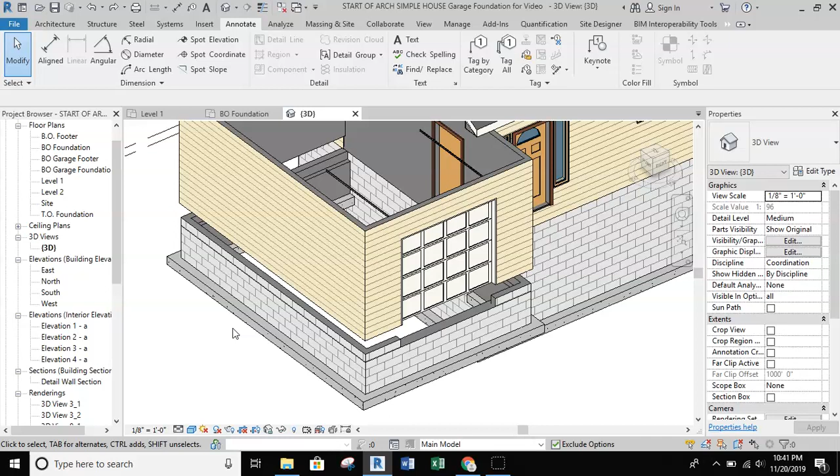Okay, in this video we're going to continue with creating a garage foundation system and installing an insulated concrete slab. So I'm going to just hide these walls quickly so we can take a look around our garage so far.

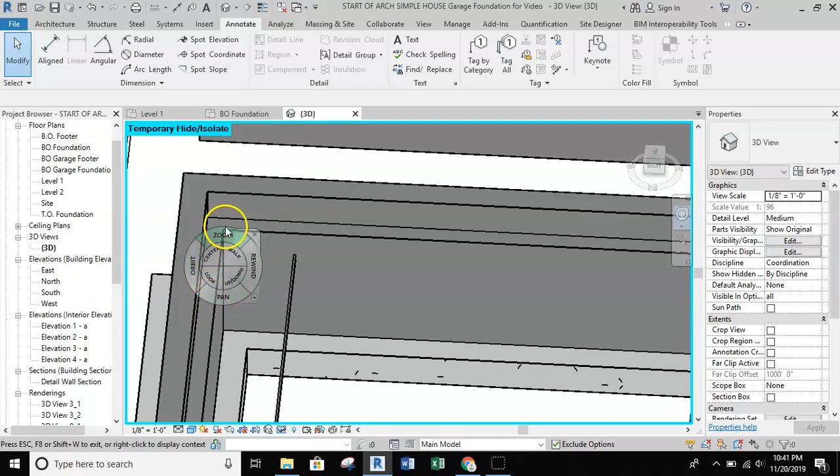If I turn this around, you can see down inside of the garage, and you can see this lip right here, where my cursor is running back and forth over. That is going to be the concrete ledge that has been created by the foundation wall, and that's going to be the ledge that holds the concrete slab. So what we can do now is continue to work on putting that slab in.

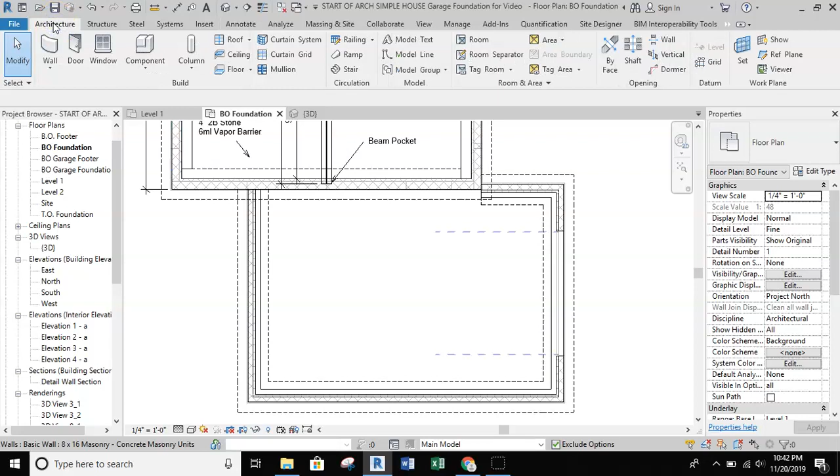What I'll do is go back to this foundation drawing and start setting up that floor system. So I'll grab my architecture tab, slide over to the floor systems, and find a floor that I can work with. So here's a 4-inch concrete floor with 4 inches of stone. I just want to edit that type.

I'm going to duplicate the floor and keep the 4 inches of concrete. Instead of having the 4 inches of stone, the stone's actually going to become a separate floor system in and of itself. So I'm going to keep the 4 inches of concrete and then have 2 inches of rigid insulation underneath of it. So we'll continue to set this up.

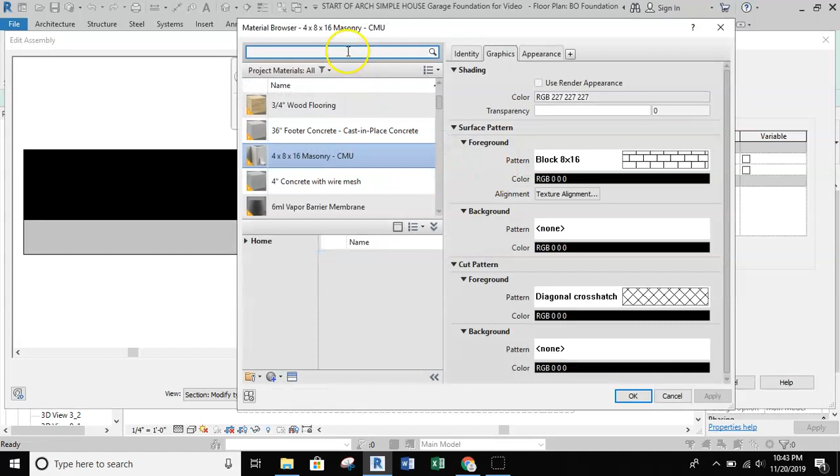We're going to delete the gravel. The 6ml vapor barrier will end up with the stone, so we'll get rid of that as well. And I'm going to insert the category of insulation. So we'll go find that insulation. There's my 2-inch rigid insulation. Keep that information there, all fine and good. 2 inches of insulation, all set, and we'll hit OK.

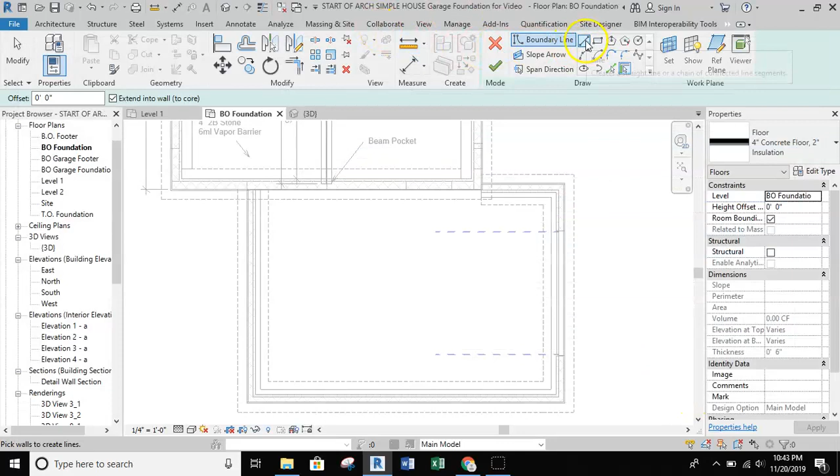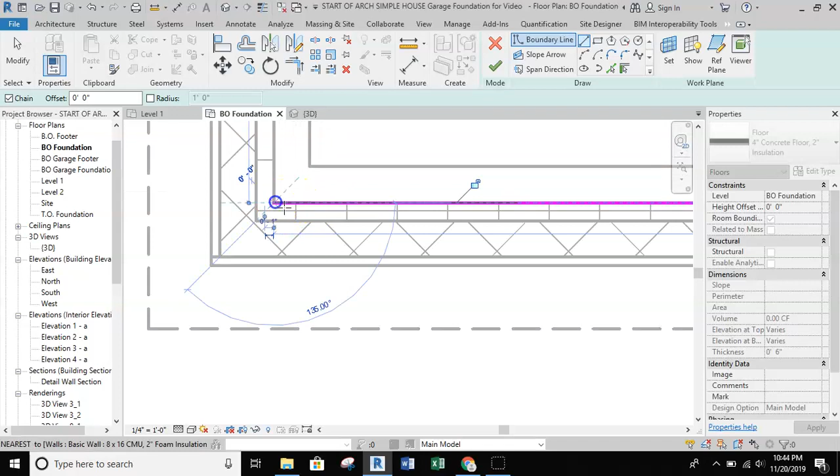So with that being said, we can start drawing in the boundary lines for our walls. This time I'm actually going to draw in the lines myself. So I'm going to zoom in and have that boundary line draw directly over top of the insulation layer, so that I'm drawing on the inside of that insulation layer and working my way all the way around the building. And then this will run directly across the foundation wall and then jog back out.

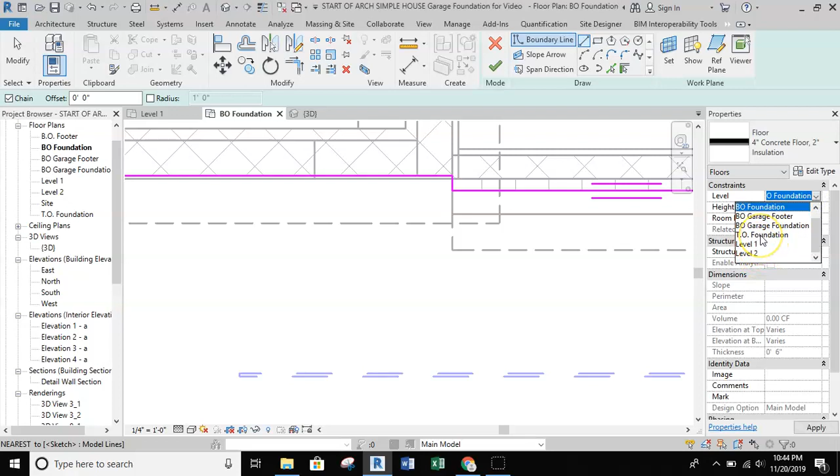All right, so that's all set, and this is going to say, oh, this was on the bottom of foundation, I don't need it there. I can move this up to TO foundation, and then we'll probably have to do some offset work. No, I don't want that to attach.

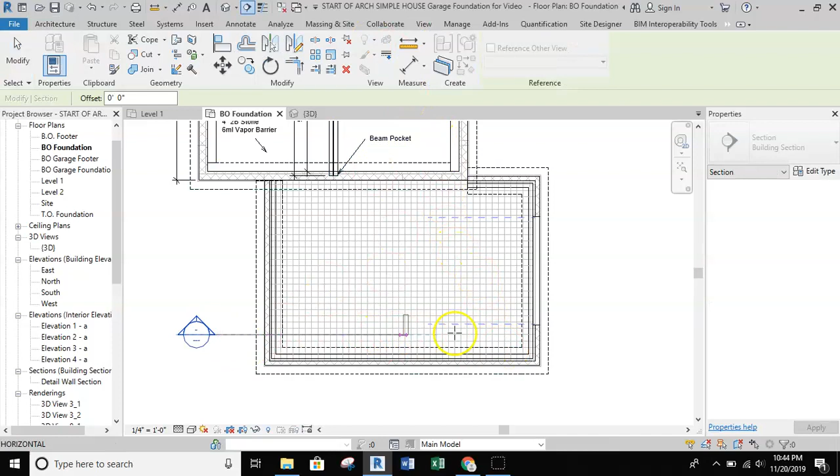All right, so now that that is set up, I want to start creating some sections. That way I can really get an idea of what's happening inside of my walls. So I'm going to get a large section running all the way across the building, and then pull this back so all I see is that portion of the wall that I'm sectioning. I'll make it nice and tight and then go to that section view.

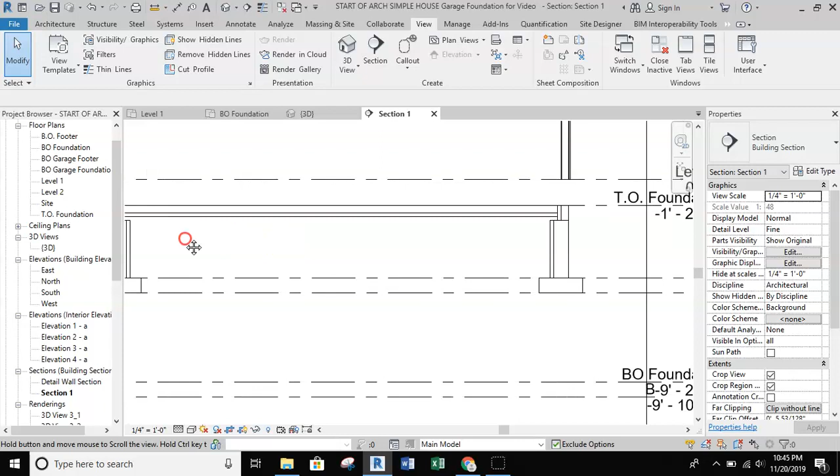Immediately I'm going to set this up so I have a fine detail level, come over here, zoom in, and we can see that I have a concrete slab up here at the top, and then this is my 2-inch slab down at the bottom. This really needs to sit down onto this ledge. So what I'm going to do is just get a quick measurement to see where I'm located.

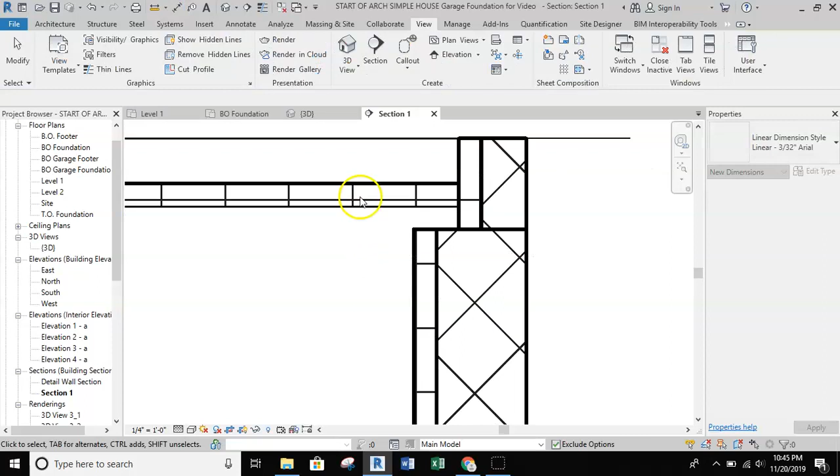It looks like I'm 2 inches high. So I'm going to go ahead and grab the slab height offset, and we'll just set this up to be -2 inches, and you can see it drops down. What that just did is it's now creating a continuous barrier.

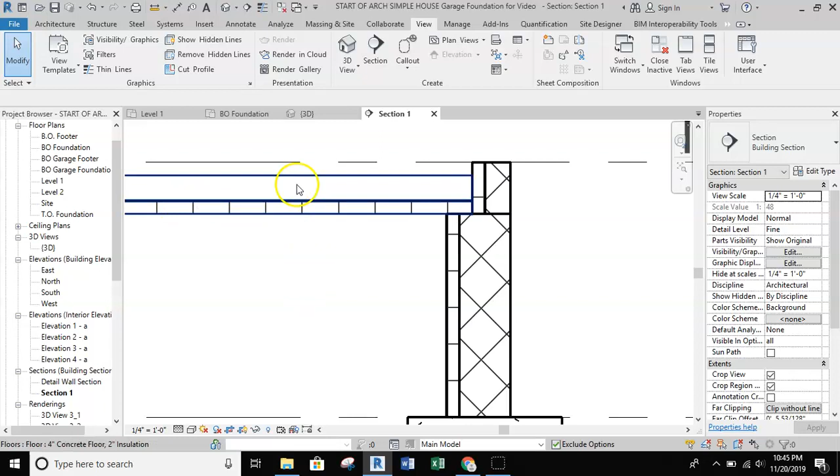This is an insulated barrier, runs down the inside of the exterior stem wall all the way down to the footer, and then that blocks, creating a block for the thermal transfer. Same for the slab itself, that's running underneath of the slab, creating a block for thermal transfer. So keeping the slab insulated and hopefully the building a bit warmer.

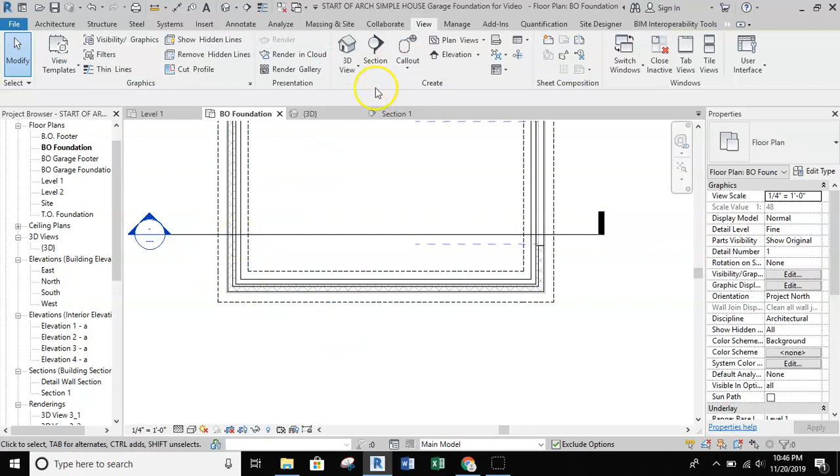So now we're going to keep taking a look at some details where I'm going to then move my section forward. So I'm actually taking a section where the garage door is, and also I can see a section of the typical wall. And we're going to take a look then to see where things are. Well, let's look at the wall over here first. Obviously this wall is not going to float around up here on nothing. This needs to come down and join into the wall system.

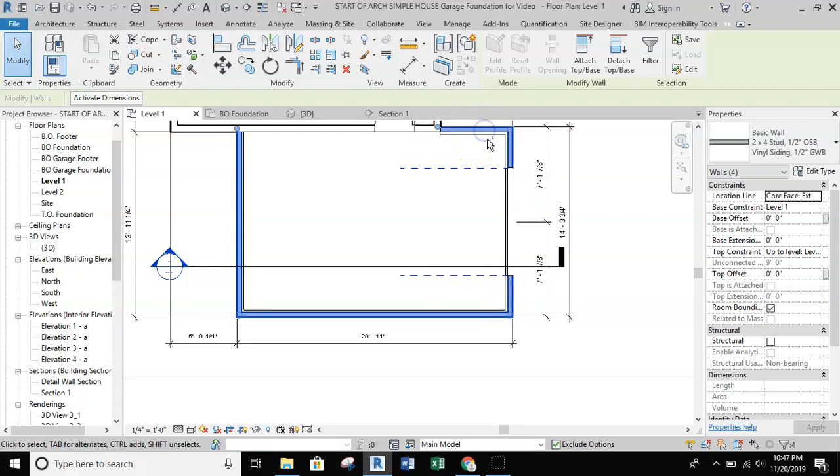So I'll go ahead and grab the wall, but what I can really do is if I went back to my level 1 and selected, holding down Control, the rest of these walls, I can move around the foundation and select those walls, and then I can tell it that the base constraint is going to go down to the TO foundation. By doing that, and I come back into my section, I can see that those walls have come down and joined the top of that solid 4-inch block.

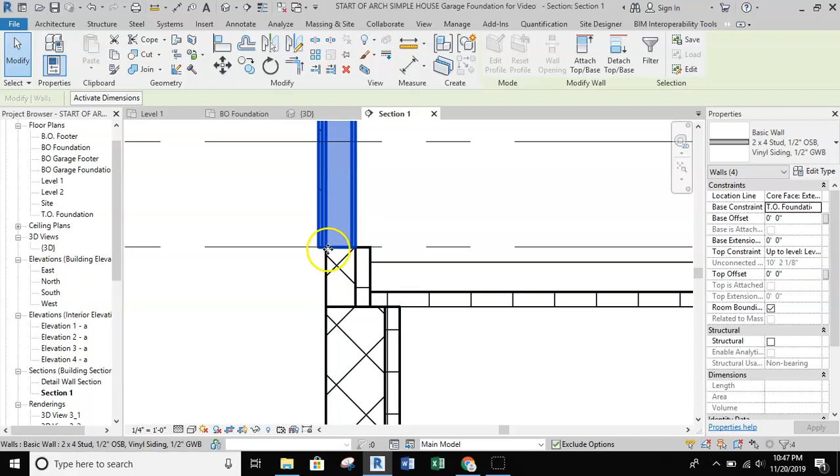That's where we would have anchor bolts running between the blocks and anchoring the bottom plate of that wall in position. So I can see now that I also have the overhang of the OSB and the siding. That's all set and looking good. I'm going to slide down to the other side, and we're going to take a look at the garage door, which is way up here on level 1. That needs to come down and actually engage with the slab itself.

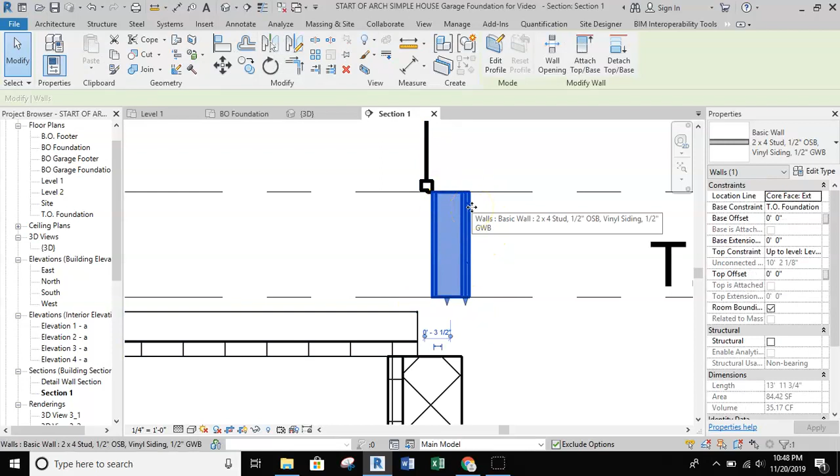Here we have a wall that's been cut below and above because of this garage door. So we need to get this garage door down and onto the slab. So we're going to reset this garage door to TO foundation, and then we're going to set it up with a negative 2-inch offset. What that just did is it comes down and sets it to the level of the slab.

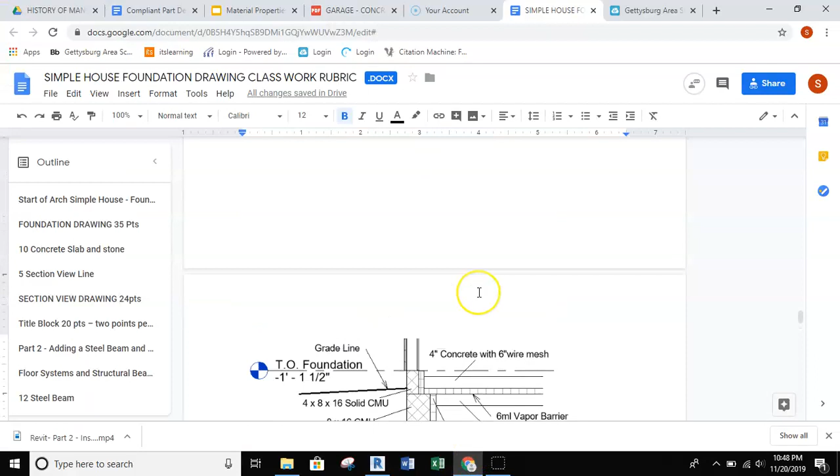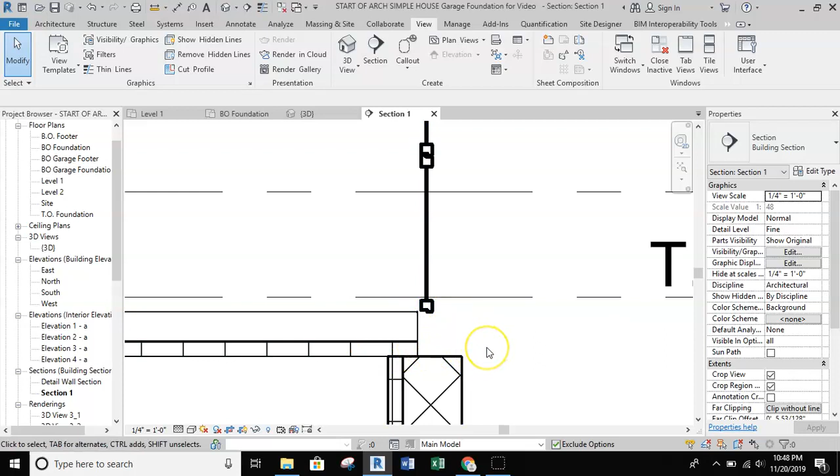Now you can see that we're missing concrete slab in this area, and if we come back here and look at the assignment, you can also see that that's missing because this section of the slab is actually called a thickened or turned down slab. This is a thicker portion of slab that will sit onto the foundation wall, and it's solid concrete. We would not want that insulating layer to run through to the outside, so we want to have a nice solid piece of concrete there.

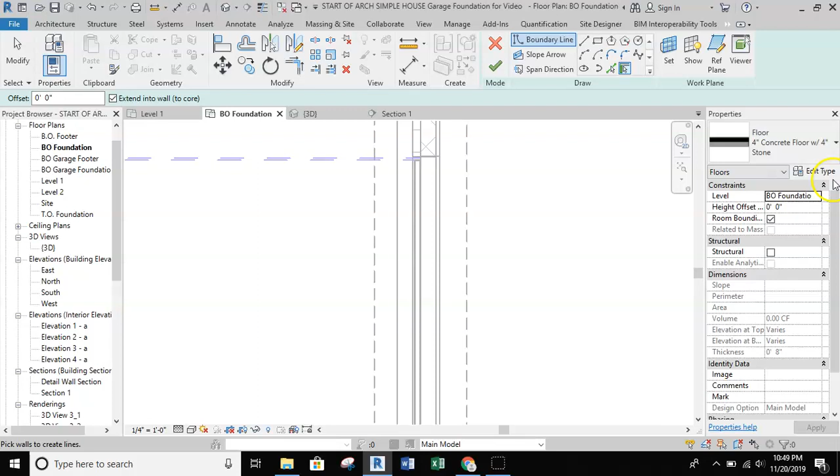To do this, we need to just create a separate small floor. So we'll go ahead and create that small floor right now, where I'm going to grab my architecture tab, grab my floor tool, and this is just going to be a solid piece of concrete. So if I just grab any concrete floor, edit the type, duplicate, and I can still call this thing exactly what it is. This will be a 6-inch

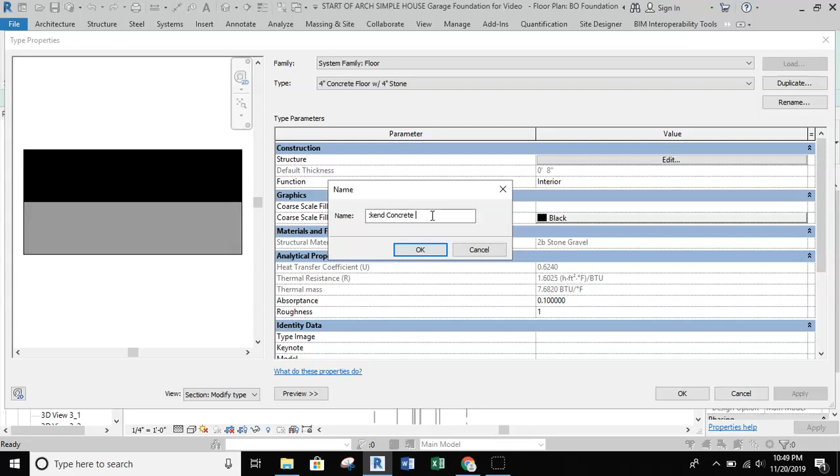thickened, don't need a cap there, thickened concrete, and it's actually called an apron. Concrete apron, and we'll hit OK to that. Pull this down, and that concrete is going to get set up to be 6 inches thick, and then I can go ahead and remove the rest of the information here.

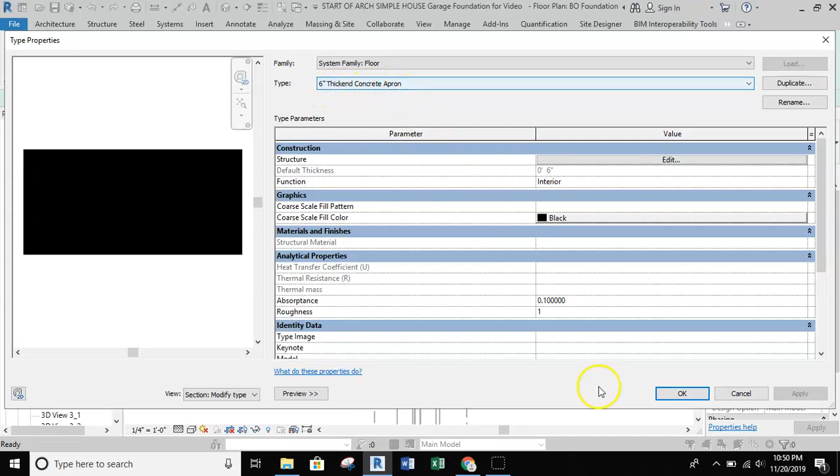So now I just have a solid 6-inch thickened concrete apron. With that set up, we'll make sure this is set up to go to the TO foundation level, and we're also going to offset this at negative 2 inches to see if it gets close to where it's supposed to end up. This time I'm going to draw in a rectangle.

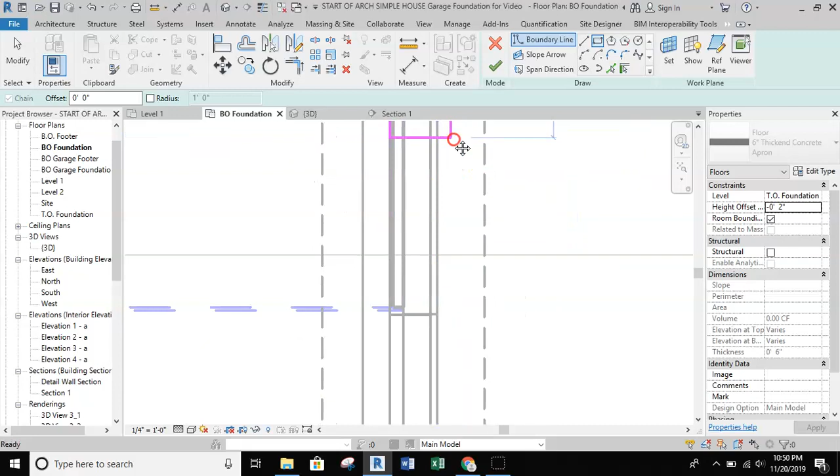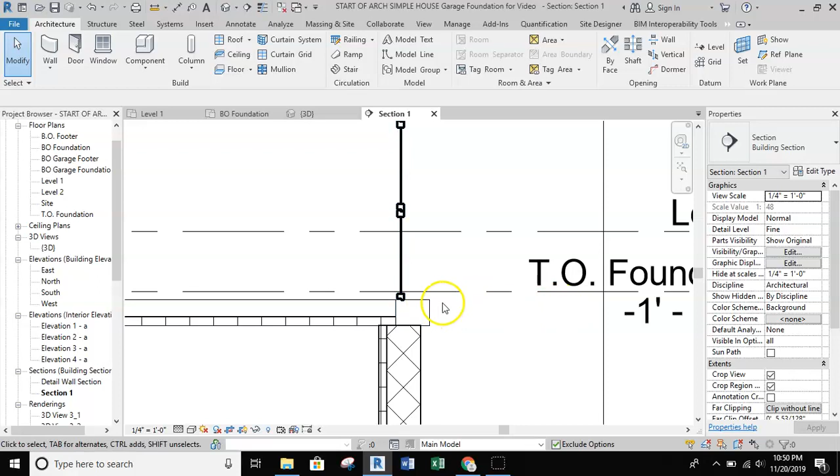We'll pull a rectangle down across where that's supposed to be, and I'm going to allow this to go slightly past the outside of the foundation wall. I want that small lip past the edge of the concrete for the wall, so it gives a better ability for the macadam and the concrete to meet the interior of the garage slab.

So there we have the detail pretty much taken care of for the garage door, and the detail is pretty much taken care of for the wall system also.

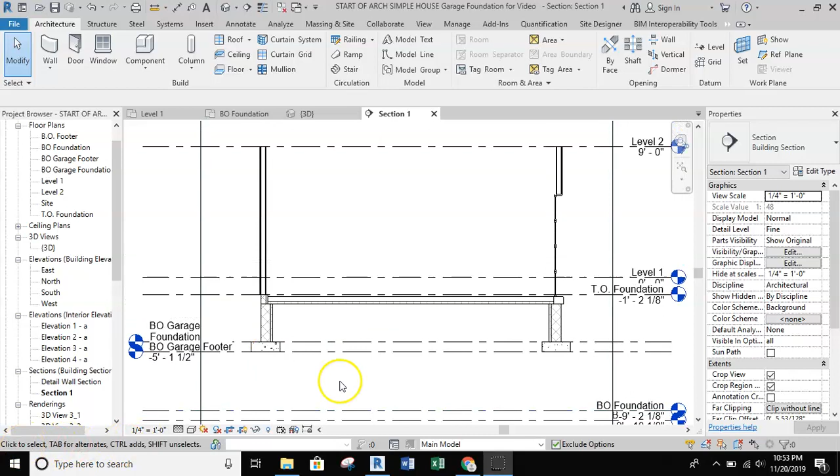Alright, so with the walls taken care of, let's jump back to the assignment and take a look right here. We have a 2-foot by 24-inch by 24-inch concrete footer CMU pier support. This support is in the middle of the concrete slab, set up so that if there's any settlement inside of the slab, it ends up supporting that concrete so it doesn't sink or buckle.

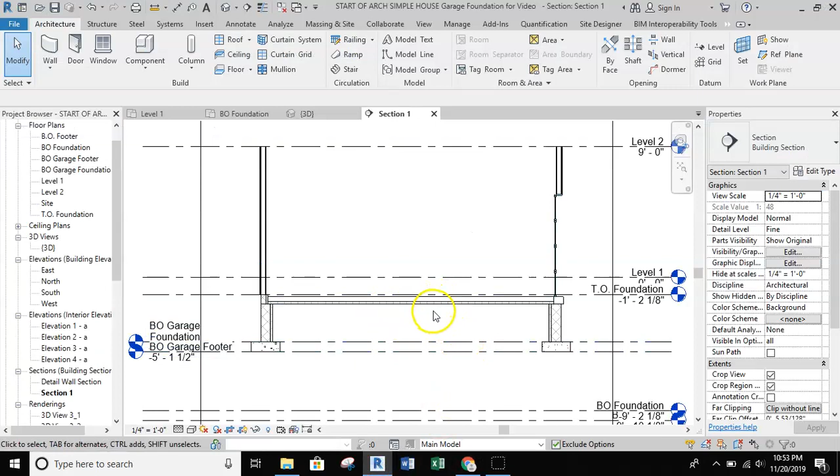So we need to go ahead and get a footer placed into the center here, and then just a pier of cinder blocks will run up to the bottom of the foam insulation. We can do that on the same level we worked on before, we just need to set up our levels properly.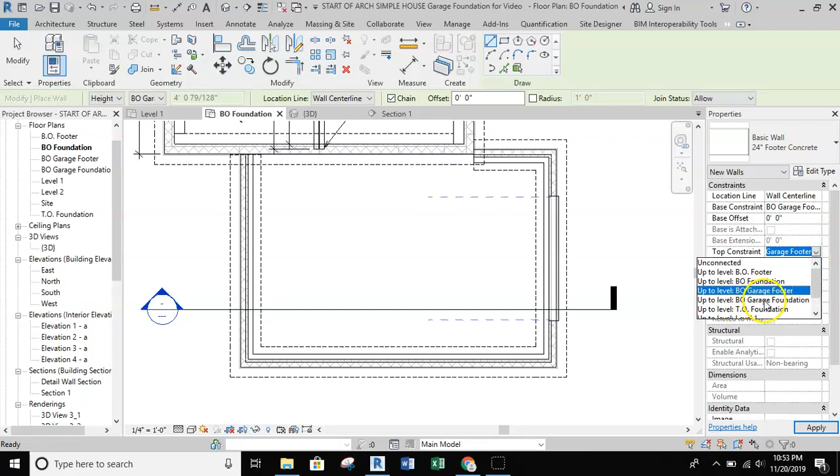We'll set the footer concrete, and tell it that it's going to go from the bottom of the garage footer up to the bottom of the garage foundation. We'll find what is rough center here, and create a 2-foot by 2-foot footer, and we'll immediately turn that into a hidden line so we don't forget to do that. A hidden 1/16, that's good.

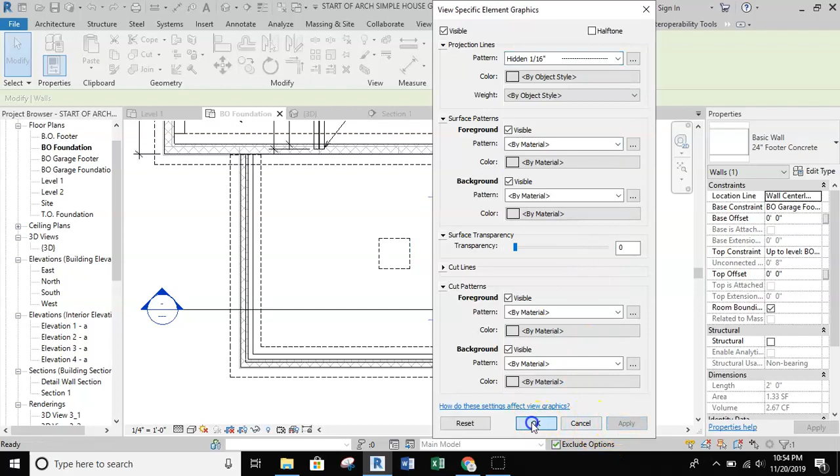Then we'll grab my wall tool and just grab my basic cinder block, masonry concrete, no need for foam since we're not doing any thermal issues here. Base constraint, this is going to be the bottom of the garage foundation, and it's going to run up to the TO foundation for now.

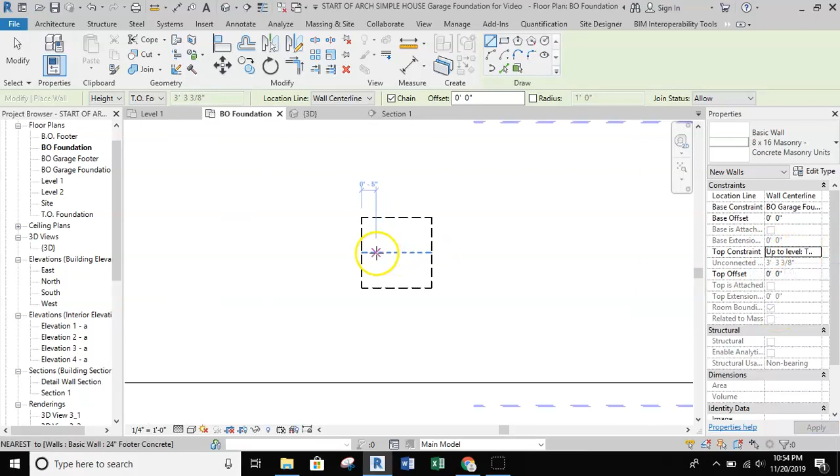And then we'll run a 16-inch piece, running one cinder block right up through the middle, and we'll move this so it's centered on the pier. So now we have our pier taken care of, pretty much tidied up, setting some things here for the foundation.

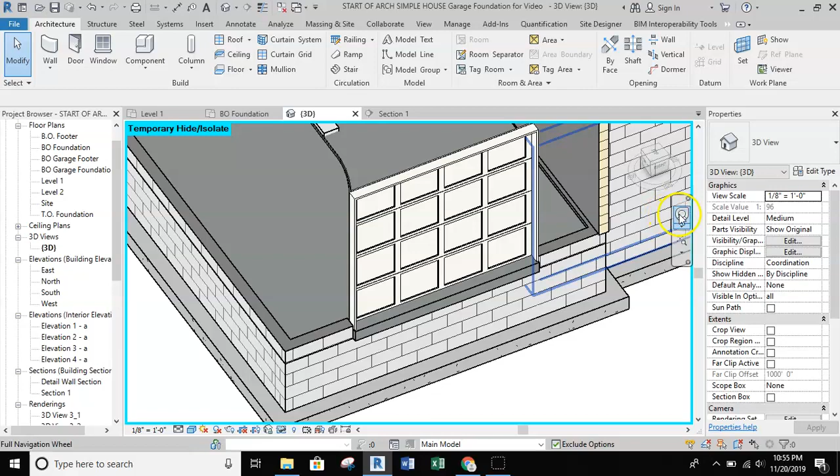What we're going to look at here, let's jump into the 3D view just quickly and have a little turnaround. You can see that the slab's sticking out. Oh, we got a little pier sticking out of there too, so we've got to fix that pier.

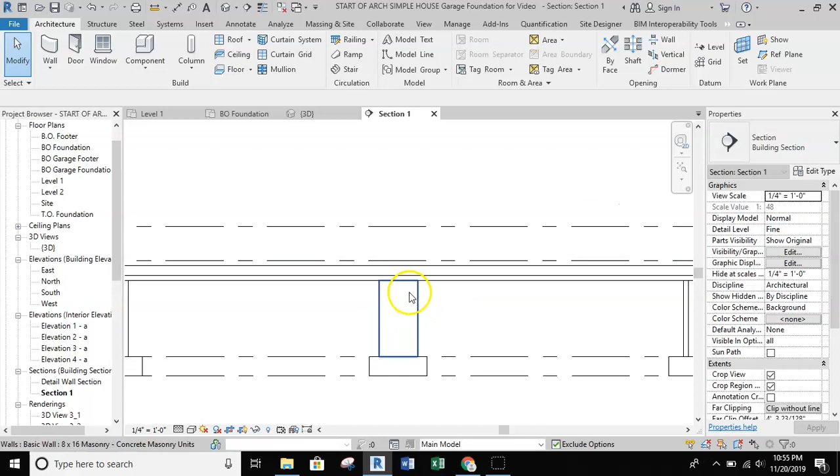What I'll do to see that is pull that forward so I can actually see it in my section, and I can take a peek here and say, let's just pull you back down under here, down underneath of the rigid foam insulation. Now we're really close to starting to set up all of our sheets and the details necessary.

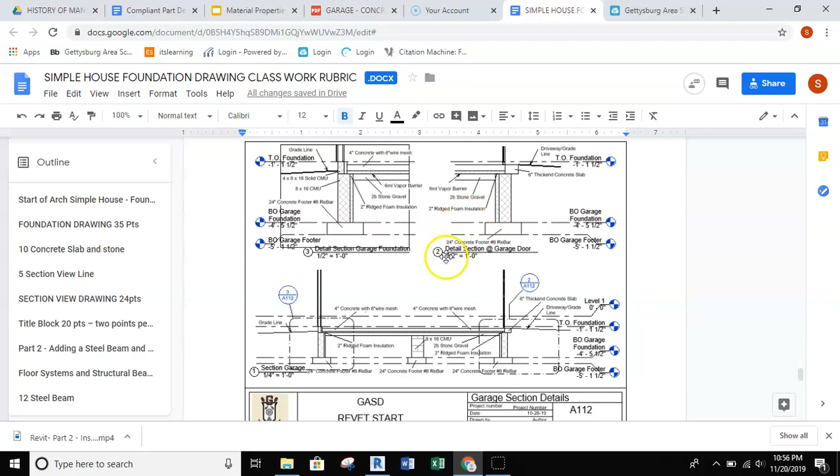So all the details that we're going to set up for this particular assignment are for the garage foundation, and then also setting up the section view with details, and then also the two callouts. We'll set that up in a separate video, so we'll have a part 4 on how to set up your sheets.